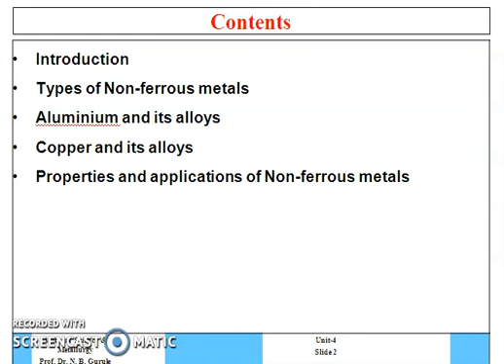Now in this non-ferrous alloys unit, we are going to discuss different types of non-ferrous metals, their properties and applications. So what exactly is the content of this unit? The introduction to non-ferrous metals, types of non-ferrous metals. Popular non-ferrous metals are aluminum and its alloys, copper and its alloys, and some other non-ferrous metals are also there. We are going to discuss the properties of all these non-ferrous metals and their applications. So let us start with the non-ferrous metals introduction.

Now non-ferrous metals are those metals which do not contain iron as a base metal. That means if you consider iron as a base metal, that group of metals is called ferrous metals, and without iron, the group of metals is called non-ferrous metals. Now the most common non-ferrous metals are aluminium, copper, lead, zinc, nickel, titanium, cobalt, chromium, and some of the precious metals also come under this category. These are gold, silver and platinum.

Now these non-ferrous metals have some unique properties, and because of these unique properties they are used for different applications where ferrous metals cannot be used. The first attractive property is attractive color and low density or low weight, for example, aluminium; then high thermal and electrical conductivity, for example, copper. Non-magnetic property, or resistance to corrosion is very high, for example, zinc, and all these non-ferrous metals are easy to fabricate. That means we can machine, cast, weld, forge, roll all these non-ferrous metals very easily with less energy.

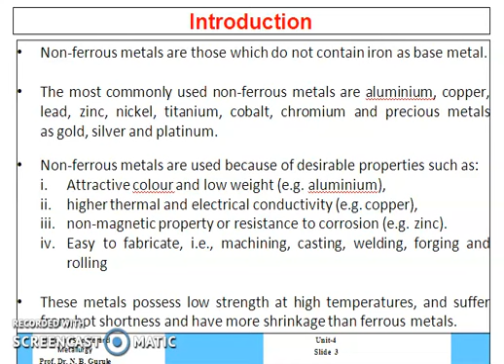Now these non-ferrous metals possess low strength at high temperature, they suffer from hot shortness, and they have more shrinkage than ferrous metals. But despite these limitations, they are still used for industrial applications. So let us start with different non-ferrous metals. The first non-ferrous metal is copper. Copper, we know, is a corrosion resistant metal having a reddish brown color.

Some common properties of copper are high thermal conductivity, due to which it is used for heat exchangers, heating vessels and appliances. Copper has high electrical conductivity, so it is used for electrical conductors in various shapes and forms. It has good resistance to corrosion, which is why it is used as a protective coating on steel prior to nickel and chromium. It has high ductility, so it can be easily cold worked, folded, spun, but copper requires annealing after cold working as it loses its ductility after cold working.

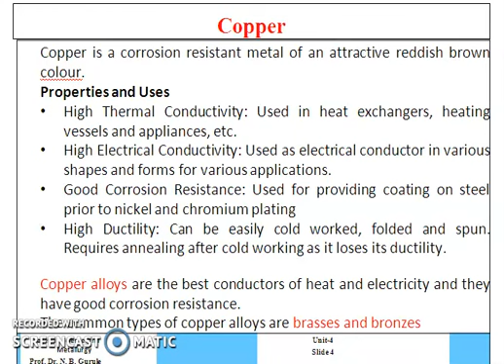Now there are some common copper alloys having the best conductivity for heat and electricity with good corrosion resistance. These copper alloys include brasses and bronzes. So let us see about brass. All brasses are basically binary alloys of copper and zinc, with as much as 50% zinc. Brass has greater strength than copper but lower thermal and electrical conductivity. Brasses possess good corrosion resistance and are easily soldered. Tensile strength and ductility of brass increase with increasing zinc content up to 30%.

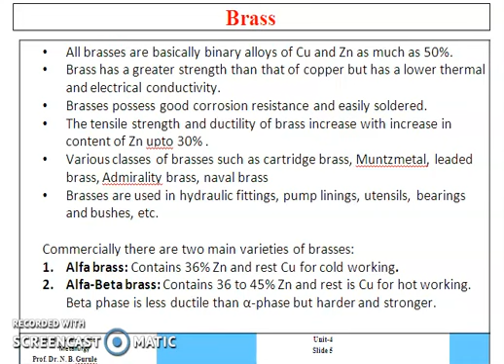Various classes of brass such as cartridge brass, Muntz metal, leaded brass, admiralty brass, naval brass are widely used for special applications. Brasses are used in hydraulic fittings, pump linings, utensils, bearings and bushings. Common commercial types of brasses are: number one, alpha brass, which contains 36% zinc and the remaining copper. Alpha beta brass contains 36 to 45% zinc and copper. Normally alpha beta brass is used for hot working. Beta phase is less ductile than alpha phase, but it is harder and stronger. So hot working is used to make useful products from alpha beta brass.

The second category is bronze. It is an alloy of copper and tin and is usually termed bronze. The useful range of composition is 75 to 95% copper and the remainder tin. In general, it possesses superior mechanical properties and good corrosion resistance. The alloy can be easily cold worked to make wires, rods and sheets. With increased tin content, the strength and corrosion resistance of bronze increase.

There are popular types of bronzes such as phosphor bronze. It contains phosphorus, that's why its name is phosphor bronze. It possesses good wearing quality and high elasticity. Phosphor bronze is resistant to salt water corrosion. It is used for the production of gears, nuts, machine components such as lead screws, springs, pump parts, linings, etc. The second bronze type is gunmetal. It contains 2% zinc, 10% tin and 88% copper.

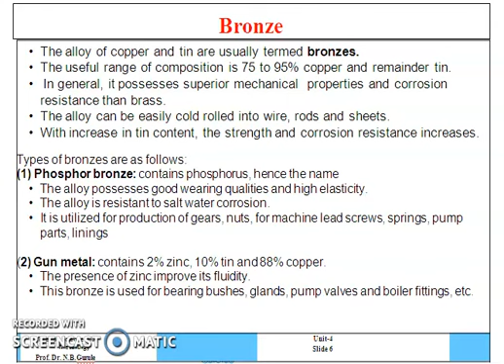Then another type of bronze is silicon bronze. Composition is 3% silicon, 1% manganese and the rest is copper. This silicon bronze has good corrosion resistance and high strength and toughness. It is widely used for boilers, tanks, stoves where high strength as well as corrosion resistance is required.

Then bell metal. It contains 20 to 21% tin and the rest is copper. It is hard and resistant to surface wear. It can be readily cast. It is generally utilized for the manufacturing of bells, gongs and utensils.

Now the next bronze is manganese bronze. It contains 55 to 60% copper, 40% zinc and very low, that is 3.5% manganese. This alloy has high resistance to corrosion. It is stronger and harder than phosphor bronze. It is utilized for the production of bushes, plungers, pumps, rods, etc. And the popular product, that is worm gear, is made from this manganese bronze.

Then next is Muntz metal. It contains 60% copper and 40% zinc. Sometimes it is named 60-40 brass. A small quantity of lead is also added. This is stronger, harder and more ductile than all normal brasses. When hot worked between 700 to 750, it responds excellently, but does not respond to cold working process.

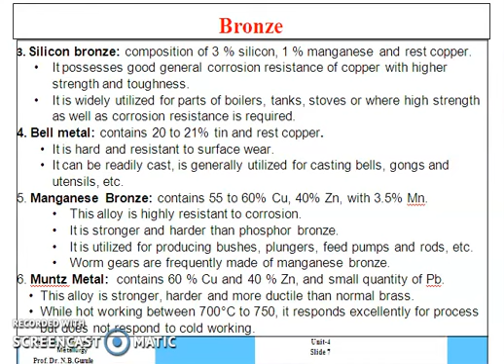Next non-ferrous metal is aluminium. We know that aluminium is a white metal which is produced from alumina, that is Al2O3. In pure state, aluminium is soft and weak. Addition of copper, manganese, silicon, magnesium makes the alloy stronger and harder. It also has good corrosion resistance, low weight and is non-toxic.

Now, like copper, aluminium has good corrosion resistance and is a good conductor of heat and electricity. It possesses high ductility and is lightweight, so it is used in the aircraft industry. It requires annealing after cold work since it becomes harder after cold working. Due to its ductility and malleability, aluminum has replaced copper in electrical transmissions and appliances to some extent. It is used in manufacturing of household utensils including pressure cookers.

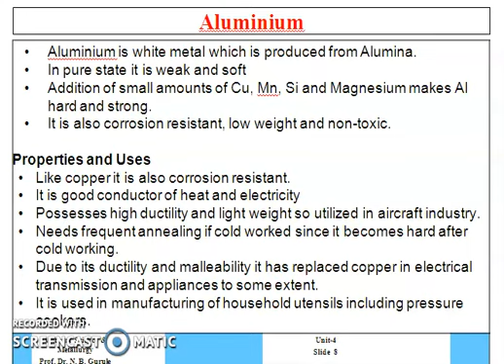Now some of the popular aluminum alloys are duralumin. It contains 4% copper, 0.5% manganese, 0.5% magnesium and remaining aluminum. It has high strength compared to mild steel and low specific gravity. Duralumin has improved corrosion resistance. A thin film of aluminum rolled on the duralumin sheet is known as Alclad, and this Alclad is used in the aircraft industry. Due to lightweight and high strength, duralumin is also used in the automobile industry.

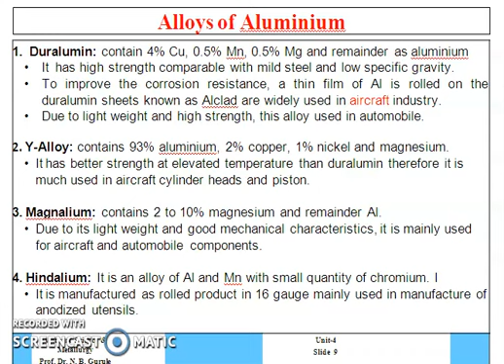Then hindalium, an alloy of aluminum and manganese with a small quantity of chromium. It is manufactured as a rolled product in 16 gauge, mainly used in the manufacture of anodized utensils.

Then the next non-ferrous metal is nickel. At least 85% of all nickel production is obtained from sulfide ores. The properties of nickel are: pure nickel is a tough, silver colored metal, harder than copper, having somewhat less ductility, but about the same strength. It is plated on steel to provide surface corrosion resistance. It is widely used as an alloying element with steel, and in alloys such as monel and inconel. Nickel possesses good corrosion resistance to both acids and alkalis, so it is widely utilized in food processing equipment.

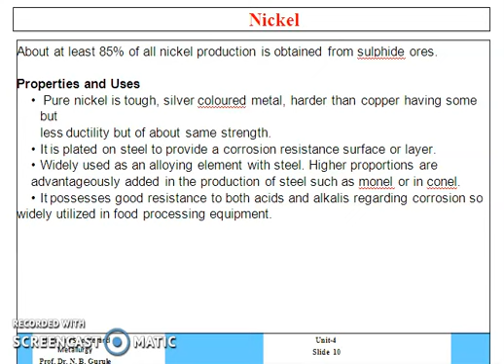Next, among nickel alloys, is German silver. Composition is 60% copper, 30% nickel and 10% zinc. It displays a silvery appearance and is very ductile and malleable. It is used for electrical contacts, castings of high quality valves, taps and in jewelry. It is also used in the production of electrical wires.

Then monel metal. It contains 68% nickel, 30% copper, 1% iron and a small remaining amount of manganese. It has corrosion resistance and good mechanical properties, maintaining them at elevated temperature also. Nichrome is an alloy of nickel and chromium, widely used for heat resistant wires and electrical appliances.

Then inconel is an alloy of nickel, chromium, iron, molybdenum and titanium, with a small portion of carbon. It is used as a high temperature alloy. Inconel does not respond to heat treatment. So these are the non-ferrous alloys.